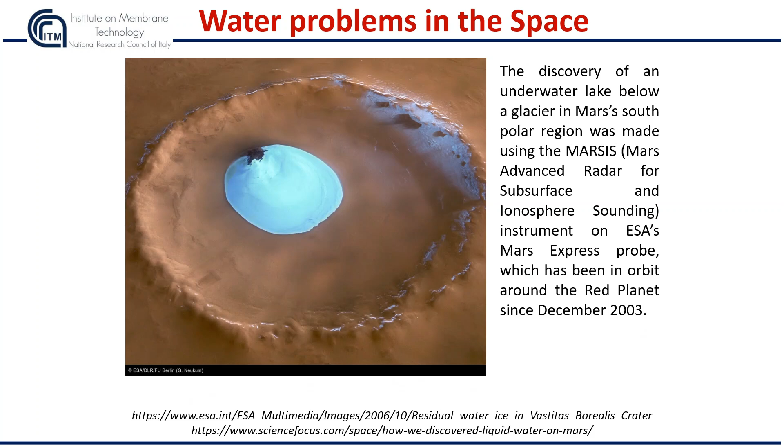I will be here in July too, and something I discussed in July, I'm insisting and telling you again. The title is different, Brine, Mine, Nexus. Let me make a couple of statements. This title means that, in my personal opinion, the water industry has much more responsibility than just producing water.

That's the first point. Much brighter opportunities and potentiality than just selling fresh water. The second point is that in the last 25, 30 years, a lot of quite interesting work has been done around the world in optimizing and solving problems related to water production.

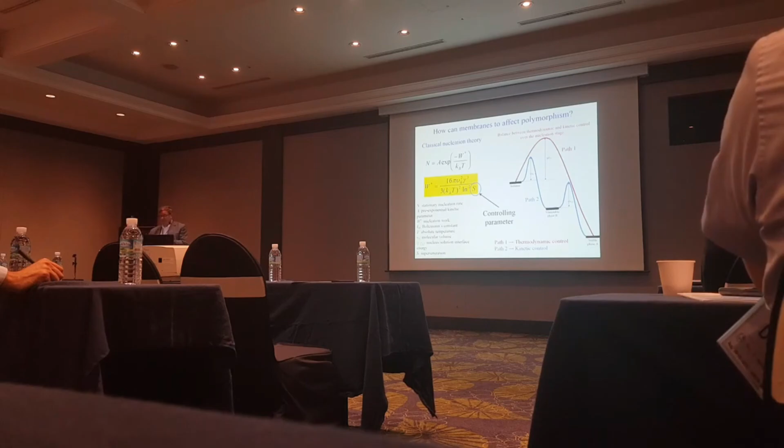We are trying to give an explanation about this, and there's a lot of interesting explanation in progress, not easy. It's a little bit naive, but basically we are extracting and removing from the system some of the intermediate kinetic forms that you can crystallize, and normally they disappear. But if you extract from the system, avoiding growing crystals, you never arrive at the thermodynamic form, and you can produce some of the intermediate forms, the ones that you might eventually be interested in.

The big project in which we are assuming that you can extract minerals from the brine that I was describing before. Keep in mind that with the brine of the RO plants existing today and running around the world, if you just extract magnesium from the existing brine, you can increase production of magnesium by 100%. You can double the industrial production of magnesium.

With lithium, which somebody mentioned today, just extracting lithium from the brine of the existing RO plants - Ashkelon, Sorek, etc. - you can increase lithium production by 30%, and for any kind of mineral, something can be done. However, it's not so easy.

Just to show you, and I will stop with this last case - this is the case I was mentioning before. In total, the conclusion of Medina: you can just purify, we can work with a recovery factor of about 92%, and you can produce fresh water and minerals. And that can be a nice way to reduce the cost of water production.